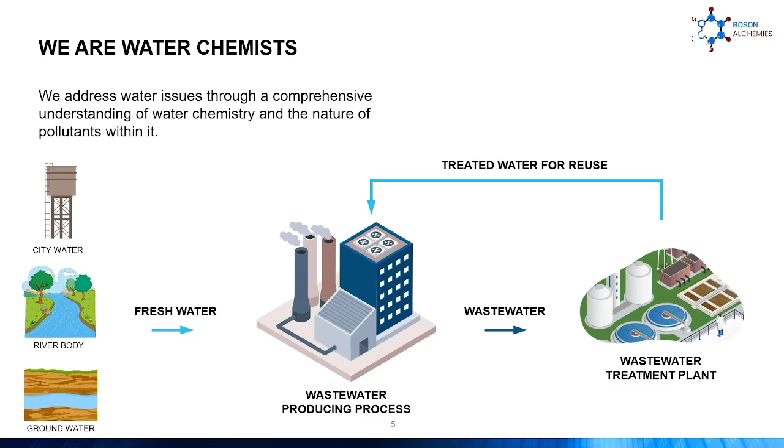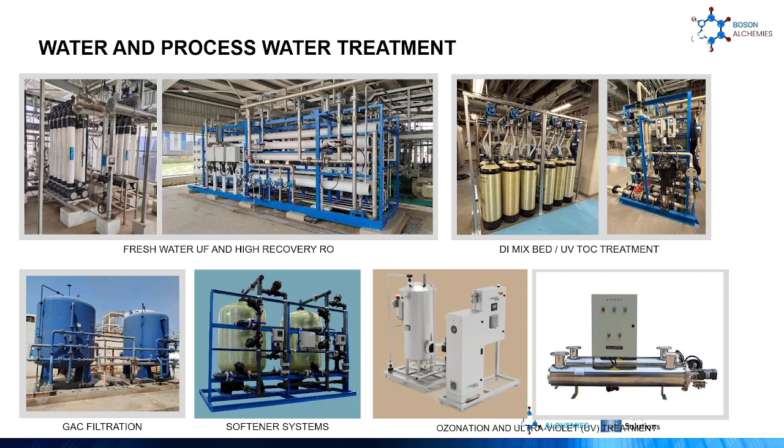Coming to fresh water, we do ultrafiltration, reverse osmosis, basic filtration to remove organics from well water, water softening, activated carbon filtration treatment, ozonation, ultraviolet treatment, and also DI water generation. We have different types of water treatment that we can deploy. That is something that we do in fresh water treatment.

When it comes to wastewater, we have developed technology using catalysts. These catalysts can remove and treat dioxin compounds, toxic compounds, and remove toxicity. We also can easily, effectively treat PFAS, and I'll repeat again, we treat PFAS. We destroy the PFAS compounds. We don't segregate or separate PFAS. The traditional technologies that are available can separate PFAS using either carbon or some kind of media. So the pollutant gets transformed from one stream to another. It does not disappear. It does not get destroyed.

There are membrane technologies and carbons that you can use to separate PFAS. But how do you treat it? We can actually oxidize PFAS compounds. So if you have the RO reject, which has all the PFAS compounds in it, we can treat the reject of RO to remove PFAS. We actually break open the carbon-fluorine bond. The C-F bond is the key bond where the PFAS compounds come from. So the perfluoroalkyl substances treatment is something that we can easily do using our oxidation process.

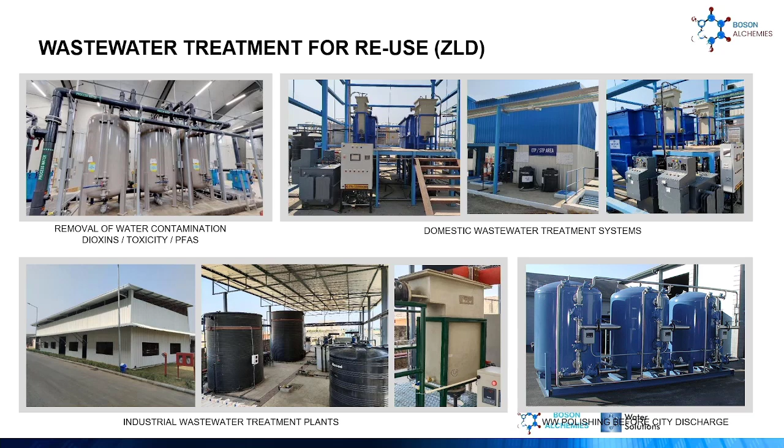We also do domestic water treatment. So if you are looking at treating sewage and bringing water back for reuse, we can do that. And of course, our strength is treating industrial wastewater, and we have done many installations across. We also do polishing. Sometimes people have compounds like residual phosphorus remaining in their wastewater before city discharge, or some toxic metals left over. We can treat that using a polishing unit with the same catalytic bed.

In terms of our strength, because we use a technology which does not need a lot of power or energy usage, with our process you can increase your profitability because you do not have the kind of OPEX that traditional systems have. We just have a pass-through bed that goes through the treatment in a simple vessel, and the catalysts take care of the pollutant. So in terms of our strengths, the amount of sludge and secondary waste that is generated in our technology is very less.

We can reuse more water with better quality. We can treat very challenging contaminants. Our plants are very simple to operate—it's just switch on, switch off. There is no adjustment of pH, you don't have to do MLSS calculation, there is no F/M ratio. There are no such complex things that are required. You don't have to check whether the bacteria is alive or dead, or whether the bacteria can handle this wastewater or not. Those challenges are not there with us.

And we need the lowest footprint. We do not need large aeration basins, large anoxic tanks, and a lot of storage. We don't need all that. We simply need a process tank with 3 minutes, 5 minutes, or 10 minutes of reaction time, and the water is treated.

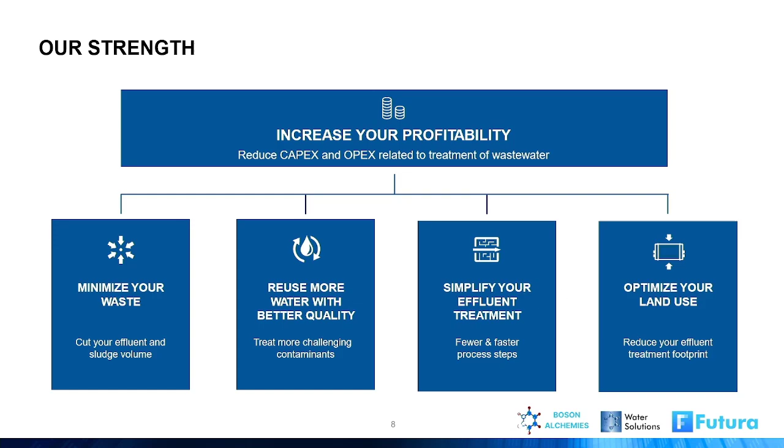Coming to, as I mentioned, we are basically chemistry driven. So looking at chemistries, we can treat aromatic compounds, ammonia, phenolic compounds and phenols, cresols, organics, phosphates, sulfates and nitrates, the inorganic salts. We can treat dioxin compounds, do hydrocarbon treatment - anything that is non-biodegradable we can easily treat.

It can be polymers, it can be colloidal silica. Many places you'll see that water has silica present in the form of bore water or groundwater. With that silica, if you have to treat the water, it's going to destroy the membrane, because silica is very abrasive for reverse osmosis or nanofiltration membranes. So you don't want silica to pass through those membranes. Treatment of silica is very important.

Similarly, if there is disinfection required, if you need PFAS compounds to be treated, if metals have to be removed, this is an area where we can actually help.

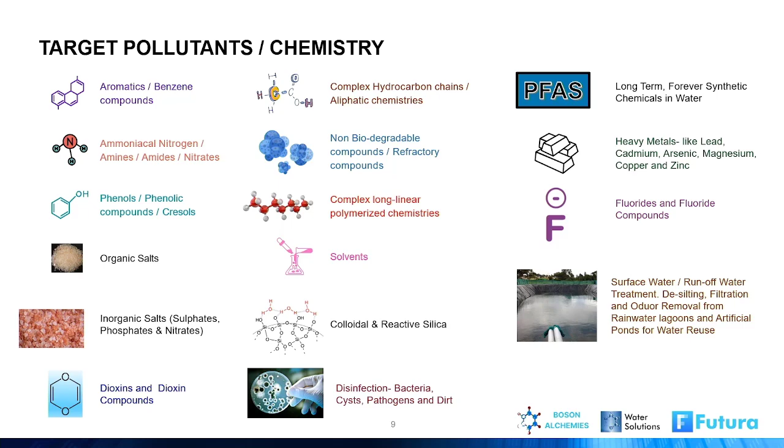Conventional versus us - our technology we call hydro-oxidation, as a process, as a brand name or whatever you call it. As compared to conventional processes where you have multiple steps - coagulation, flocculation, aeration, anoxic - different steps that the water goes through, whereas in hydro-oxidation, our process, we have one single step which has the combined effects of all these different steps and processes. So it is very simple.

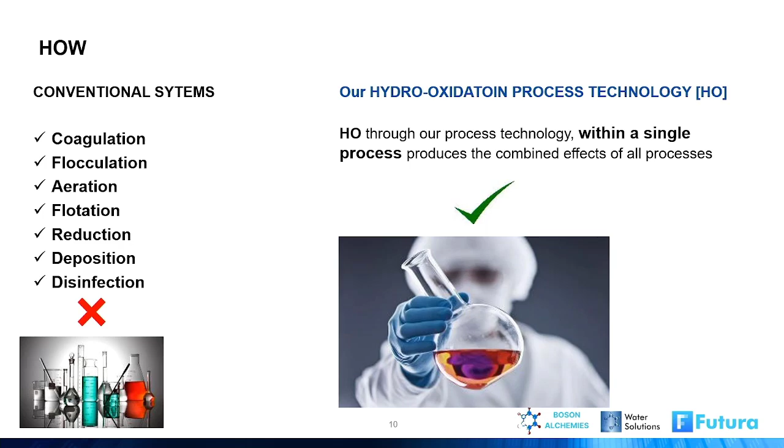It is more potent or more effective in terms of treating much more challenging compounds. So our brand name, or company tagline, we call it hydro-oxidation. It is nothing but a catalytic oxidation.

It's a known process. Instead of using powerful oxidants like hydrogen peroxide or using Fenton and all those processes, we have fused molecular oxygen in the catalyst. It replaces technology like Fenton. It helps you get rid of hydrogen peroxide, because we use catalyst to generate the same molecular oxygen to degrade organic compounds. So when the compounds are degraded, they get converted and destroyed into CO2, hydrogen, oxygen, nitrogen.

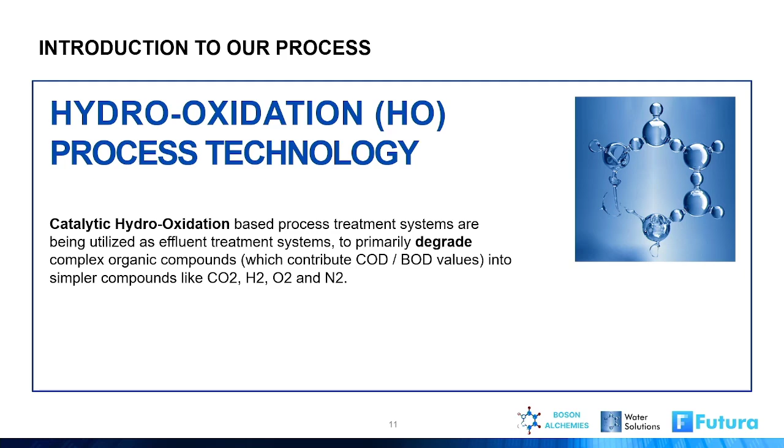It breaks that open into simpler molecules. So in terms of how it works, typically we have a catalytic bed, a catalytic reactor, where we have the catalysts in the reactor, and we can use a DC power source or we can use it without the DC power source, where the wastewater enters the catalytic reactor and generates OH radicals.

Those OH radicals are hydroxyls which degrade the compound. Once the water is treated, it goes downstream. There is separation of solids by use of filtration, and the water is put in a treated water tank. Further downstream, depending on the content of TDS, it can go to a reverse osmosis membrane, or it can go to an evaporator, or it can be used for discharge to city, or it can go for gardening, depending on the end use. So that's how the process works.

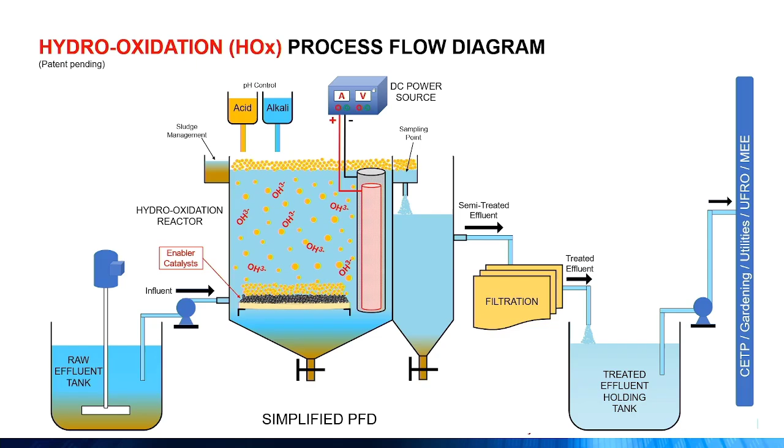These are just the steps, the same process that I just explained. These are steps in writing.

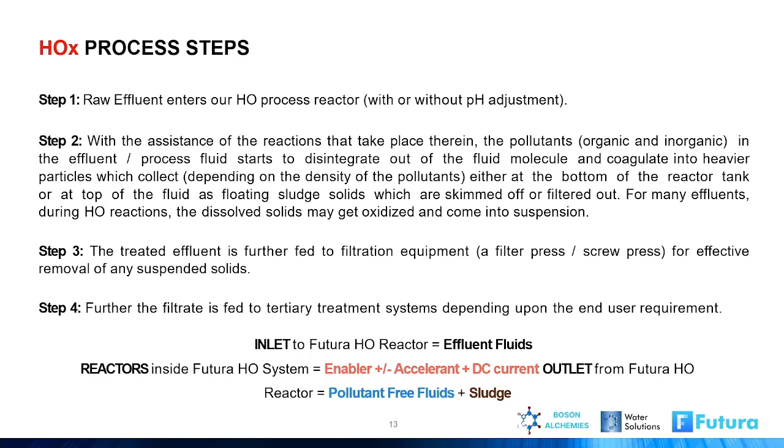So I would like to move forward with the basic - this is another offshoot of the same catalytic technology, the catalytic oxidation process that we developed. That particular process is indiscriminate, it works on all pollutants together.

It will work on COD degradation, it will work on ammonia, it will work on any organic that is there - it will degrade. If there is any phosphate salt, any calcium salts, any nitrate salt, it will start degrading everything. In the real scenario in the world, what happens is people have specific problems - like you want to only degrade COD, or you want to only take care of cyanide, or you want to take care of metal.

Then we developed certain subsets of catalysts which are only targeted for certain organics. So we developed this set of catalysts only for certain types of problems. The process is the same - it does oxidation on the surface of the catalyst. The only difference is these are formulated catalysts for different problem areas. For cyanide, there's a different catalyst. For organics, there's a different catalyst. For removal of sulfide, there's a different catalyst. For pesticide, it's a different set.

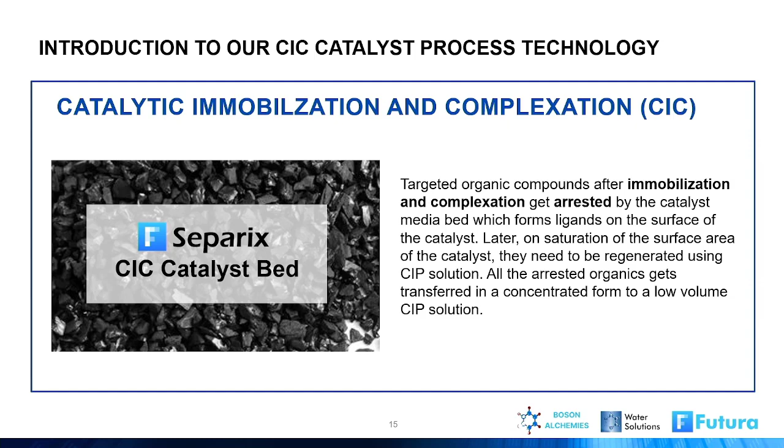So how it works - those who understand chemistry and physics will understand this well. It is a high surface area substrate on which we have doped the catalyst. When the water goes through the catalytic bed, it may have many pollutants like COD, BOD, color, turbidity, organics, nitrogenous compounds, metals. When it passes through, the targeted compounds get arrested by the catalyst, forming ligands on top of the surface of the catalyst. Only when the regenerant and the conjugate of the catalyst enters the catalytic bed are these arrested compounds released into the regenerant. This is how the technology works, and once the regenerant fluid is saturated with the compounds, it gets discarded.

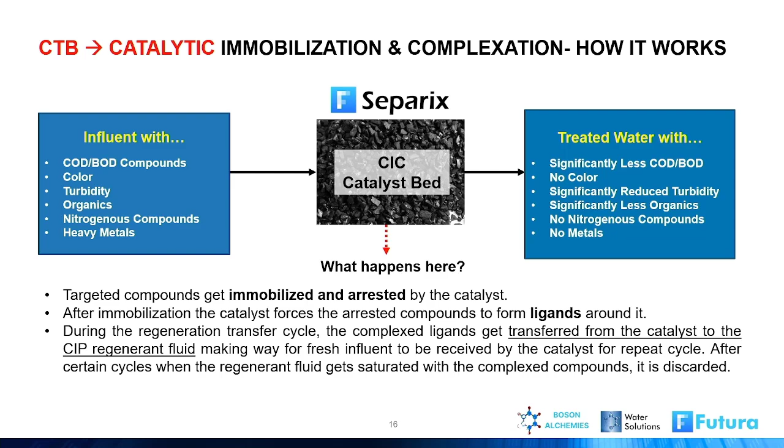So as I mentioned, the CIC catalytic bed treatment is designed for different formulations. It can be for any of these - phenols, hydrocarbons, dyes, metals, halogenated compounds, produced water, oil and water emulsions, removal of ammonia. There are a lot of different catalytic formulations that we have developed.

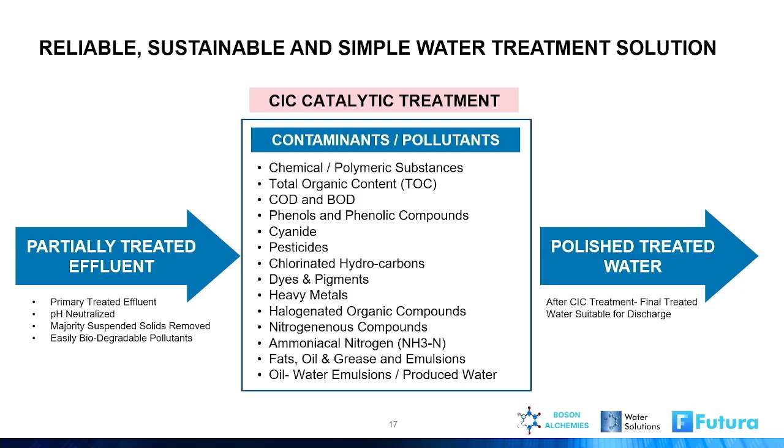In terms of operation, the CIC bed process is very simple. There is effluent feed, so there is a forward flow. There is a backwash in case there is any suspended solids in the water, and a backflush. The backwash basically releases any suspended solids that get captured and settled on the catalyst surface - we don't want the surface area to be blocked. During saturation, a regenerant fluid comes in, and this regeneration releases the captured compounds into the regenerant stream.

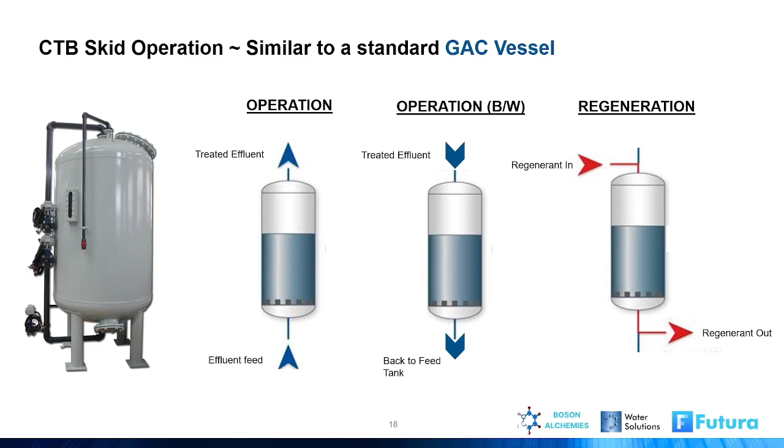We have our pilot setups on the catalyst treatment. We have pilots with 1000 liters per hour capacity, 200 liters per hour capacity. We also have the oxidation process treatment with 1000 liters per hour capacity pilots that we've developed.

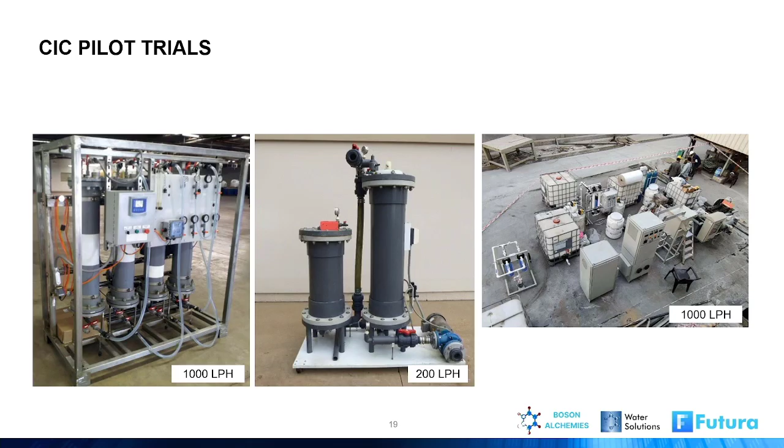In terms of advantages, as compared to conventional, our plants are ultra compact with less than 10% space required. We don't have any civil works. We don't use any bacteria, so there is no MLSS, no FM ratio, no biomass calculations - it is simple switch on, switch off. We don't need any skilled manpower to run the plant. All our plants are modular, so we don't have large civil infrastructure-based installations which cannot be moved. You can install our plants anywhere and shift them any number of times. Our plants are delivered in 10 weeks time - 10 to 12 weeks is what we need to supply the plant.

Everything is modular in our process. So in case you are looking for a certain capacity now, you install only that capacity now. When you want to expand, you add more modules. You don't have to install all the capex and opex for the future - you install as and when you need it.

Similarly, the sludge generation is much lesser - less than 70% sludge compared to conventional, because we don't add anything to our process. The water goes through the catalytic bed and comes out. We remove pollutants and don't add any food - there is no food to be given to bacteria or anything. So we are not adding any sludge in the system.

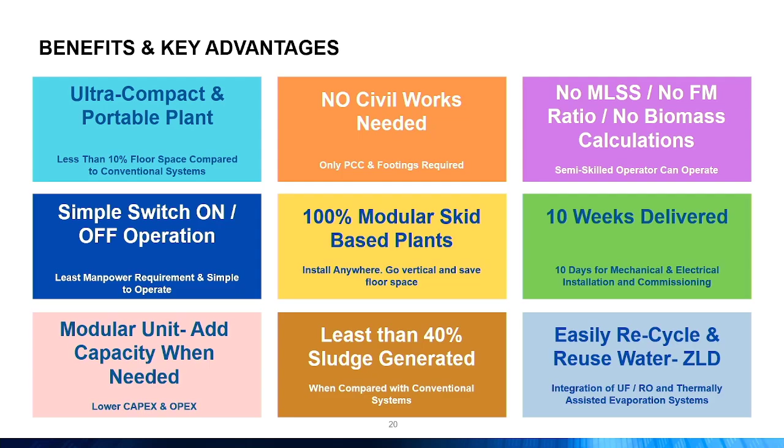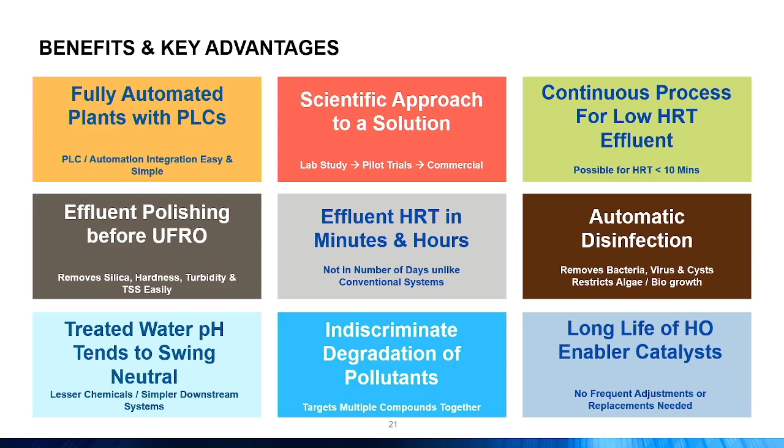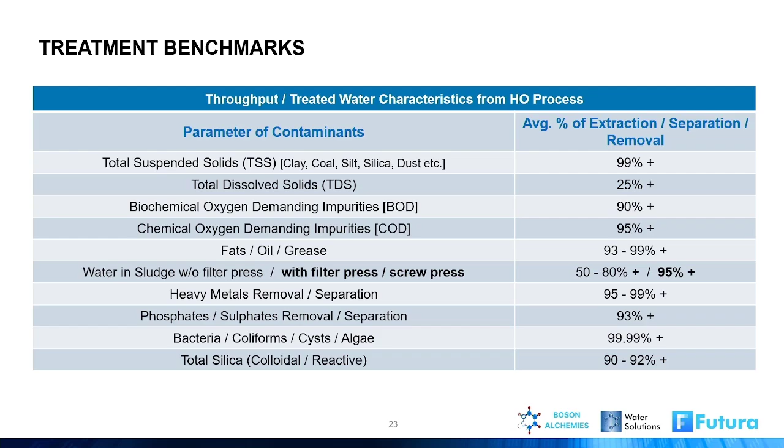We have treated many effluents. We have seen reductions in COD, reductions in BOD up to 95%. We can reduce silica, suspended solids. We can remove heavy metals. We have seen removal of phosphates and sulphates to an extent of 93%. So these are the efficiencies that we have achieved so far in our system.

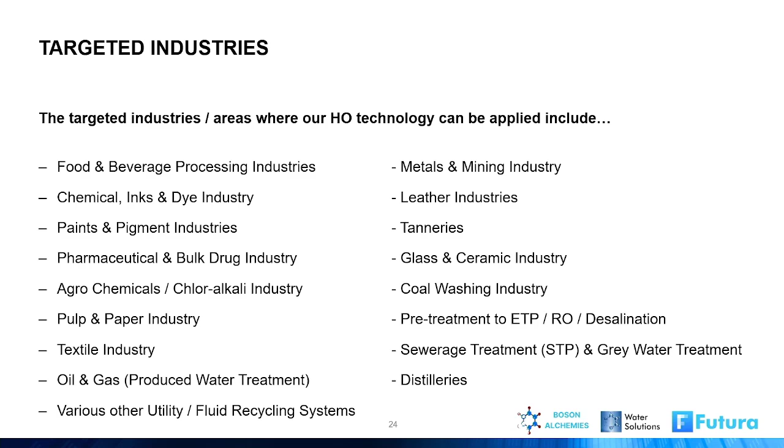In terms of industries, every industry that you know of, right from food and beverage, oil and gas, agrochemicals, chemical, pharma, textile, pulp, paper, paints. I mean, you name the industry, it's a target industry for what we do.

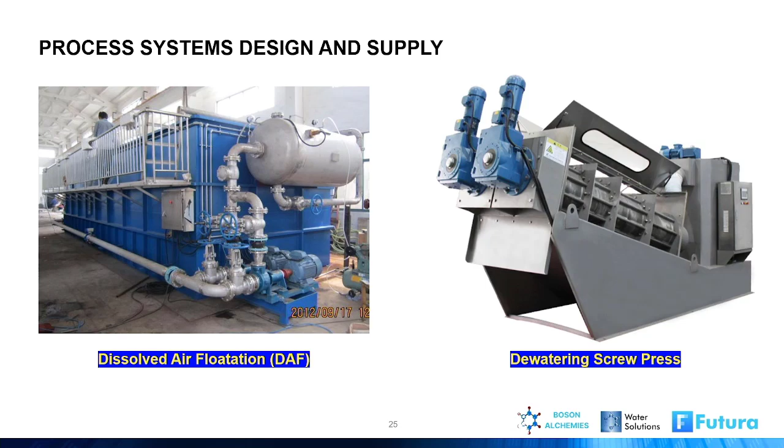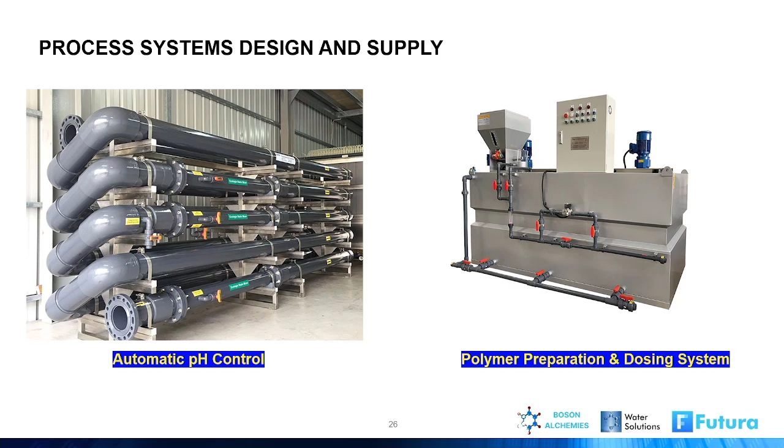When we supply the plants, we have our own process systems that we design and supply. So you can see we supply DAF. For filtration, we use equipment like DAF and screw press, which is a continuous process, because we need continuous process in our type of plants that we do. All pH control, preparation of poly and dosing of poly is all automatic. All the skids for CIP and treatment is all that we develop in our processes.

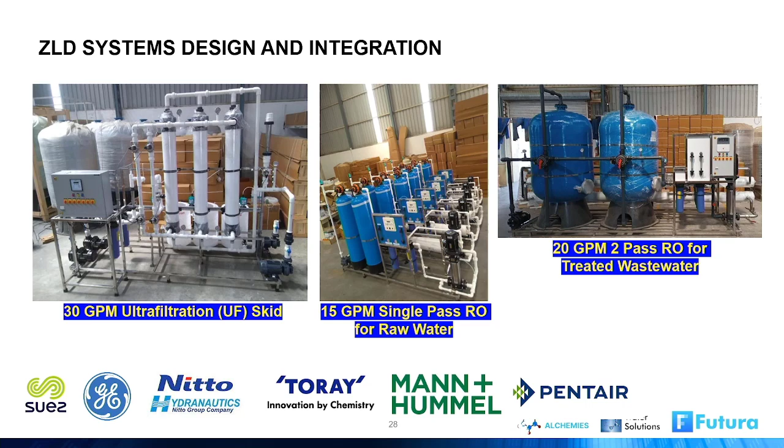Ultrafiltration. So downstream, when you are looking at reduction of TDS and suspended solids, we design ultrafiltration, reverse osmosis plants for downstream. We work with all the reputed manufacturers like Suez, which was earlier GE, Hydranautics, Toray, Mann and Hummel, Pentair, DuPont, LG, these kind of manufacturers.

We also have the capability of designing ZLD systems. So these are using MEE and MVRE systems. So when you're looking at evaporation of concentrated salts, that's where these things come in picture.

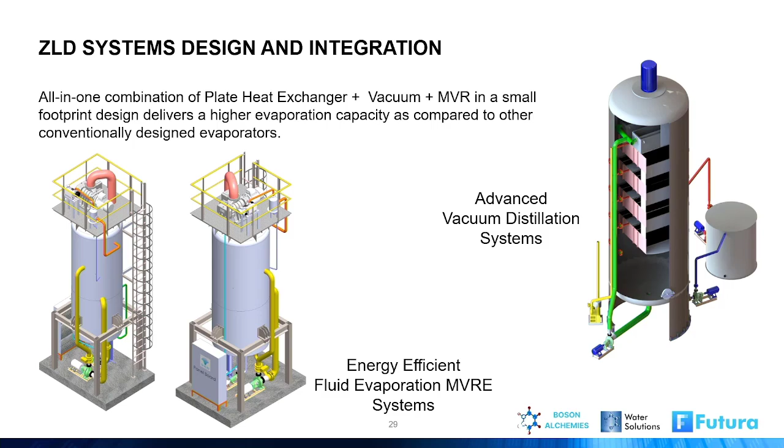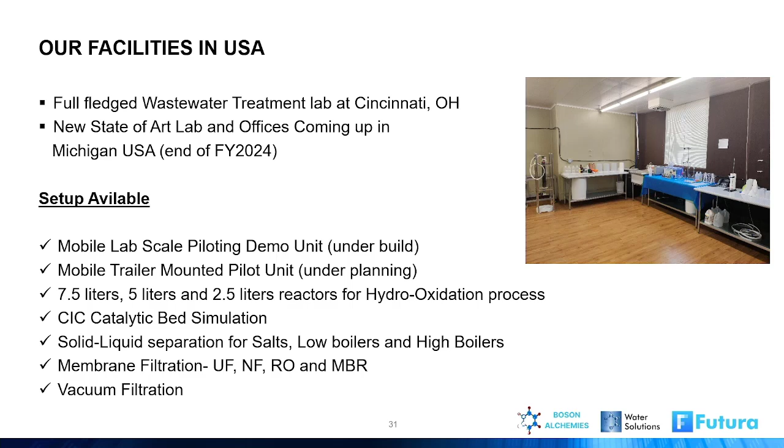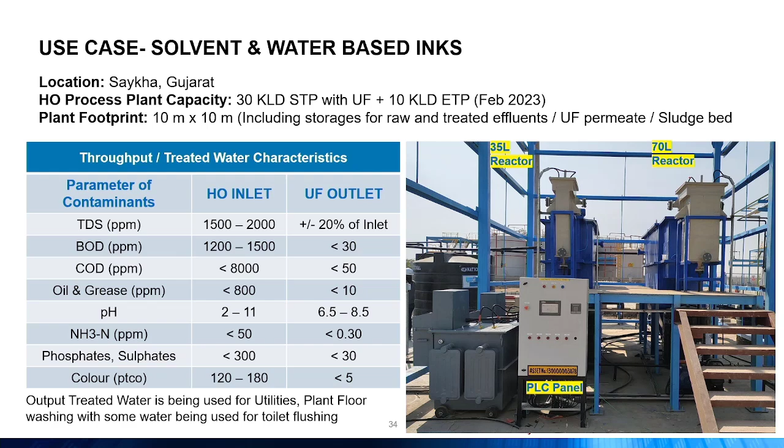Some cases, here are some installations that we have done. So this is one of the installations for an ink manufacturer. This is a Japanese company which makes solvent and water-based inks. So we set up a plant for them. This is 40,000 liters of treatment that we do every day.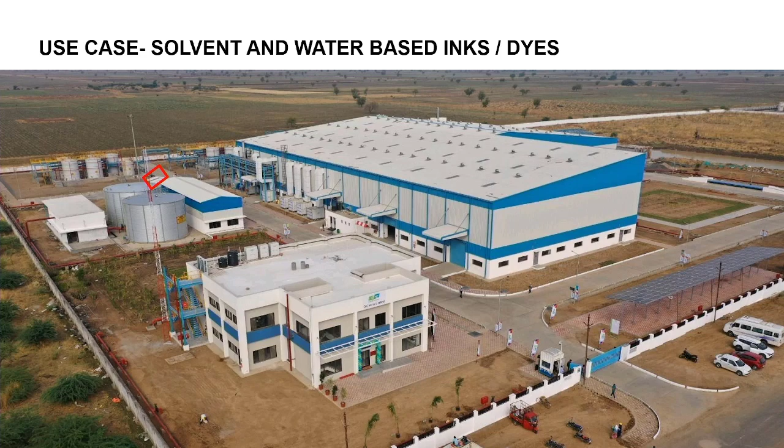So this is the facility. You see that little red block that you see, that is the plant. There's a whole facility that we have set up, but the effluent treatment plant is a very small, minuscule part of it. So this is what it looks like before construction of the shed. So the shed has now been installed, so it is an operational plant. We operate and maintain also this facility for the client.

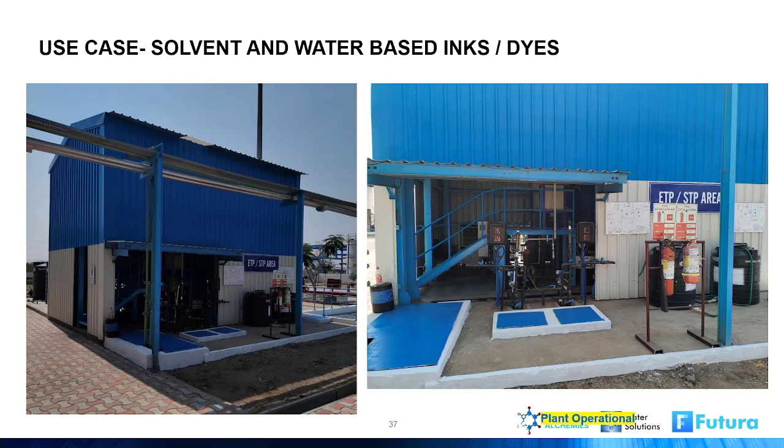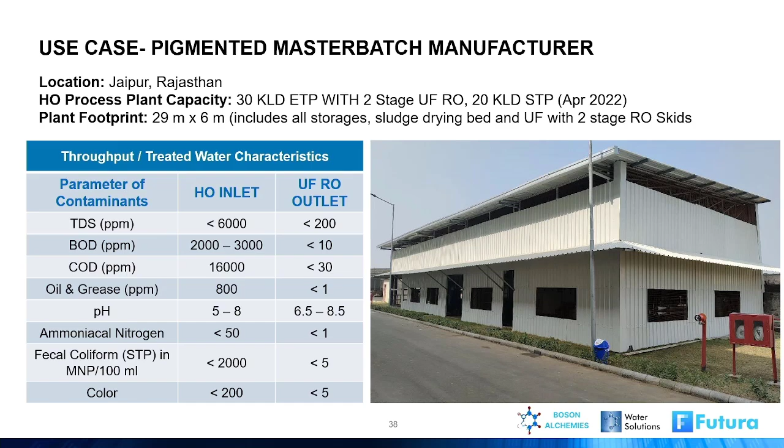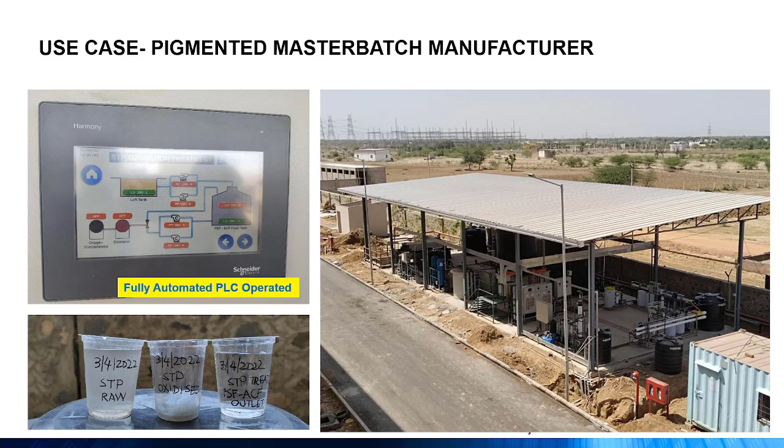It's a completely PLC operated plant. This is when it was in construction. The picture that you see on the screen is when it was under construction. So this is how the inside facility looks like. We are using all surface tanks. It's very nicely, very well maintained facility as a wastewater plant.

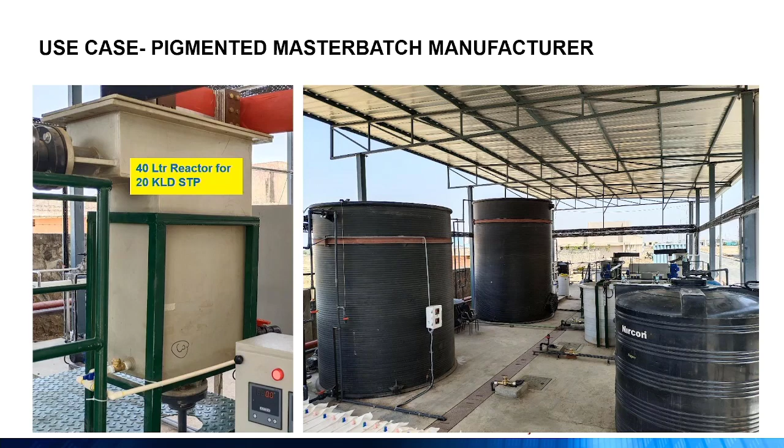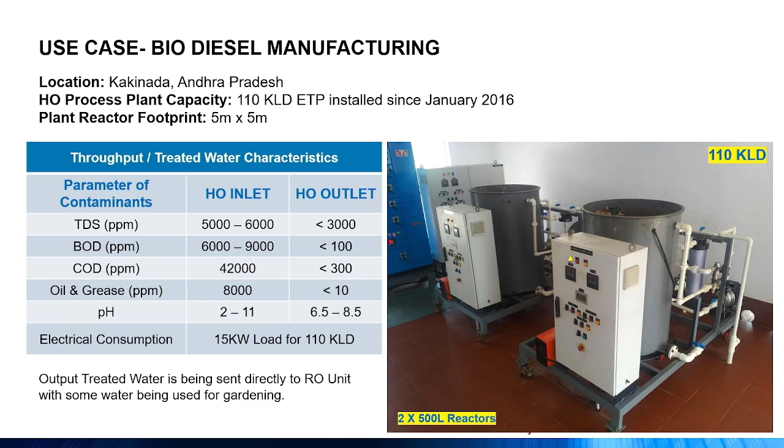So that is the beauty of the residence time that we need. We need very less time to treat water. That's why we don't need a lot of space. This is a vertical installation we did for a pharma company.

They make sodium valproate salts through a distillation process, and after distillation there are traces of the product in the wastewater. So we are removing and extracting the product, bringing the COD from 350,000 as feed down to less than 1500 through product extraction. We are also recovering the product and giving it back to the client for reuse in the process.

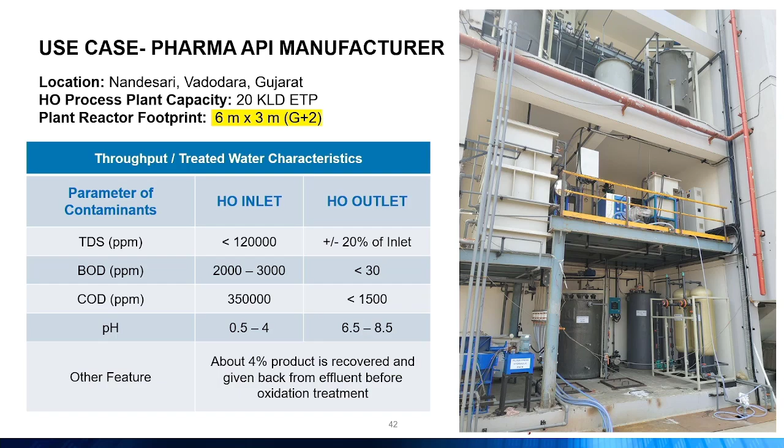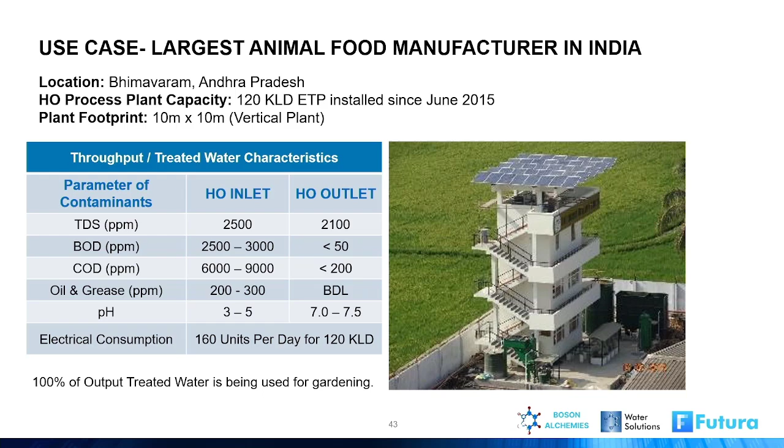There are installations we have done for animal food. This is a plant in southern India, in Andhra, for animal food. Then we have installations in crop manufacturing for sulfur chemistry, where we have done treatment plants.

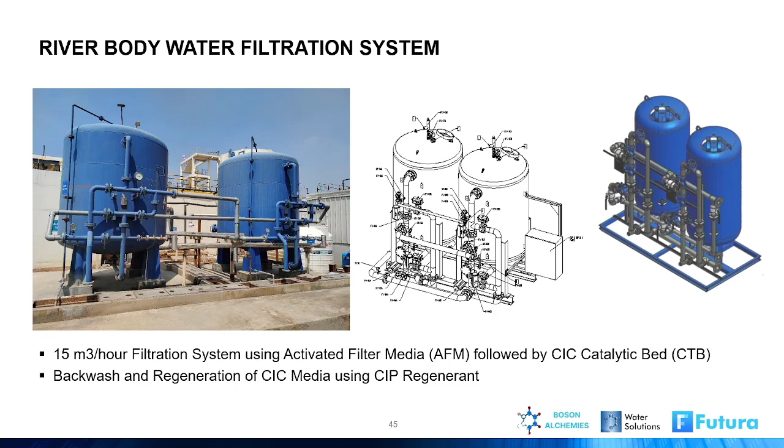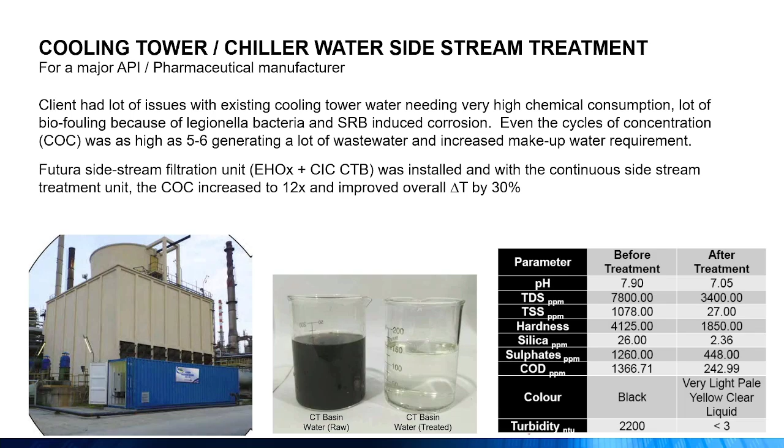We have done cooling tower treatment. You can see the pictures on screen, the basin water of the cooling tower with SRB bacteria — there's Legionella and sulfate reducing bacteria. The moment you have SRB, the water turns black. We treated that water, and you can see the parameters: high COD and high hardness, which we reduce in our process. The delta T of heat transfer is impaired drastically because of these bacteria, but we can treat such chemistries very easily.

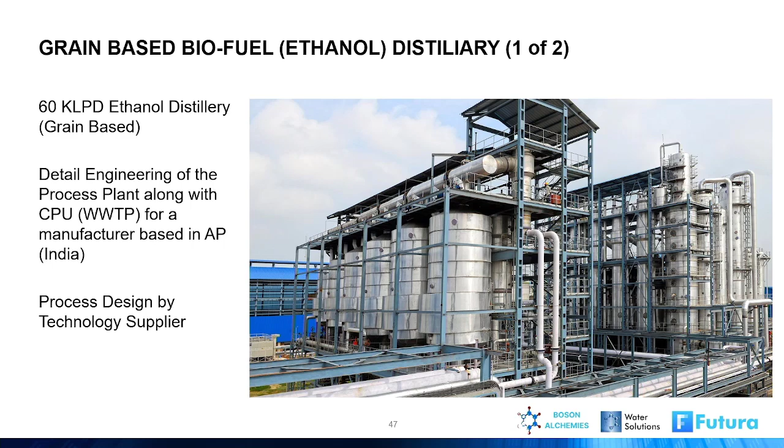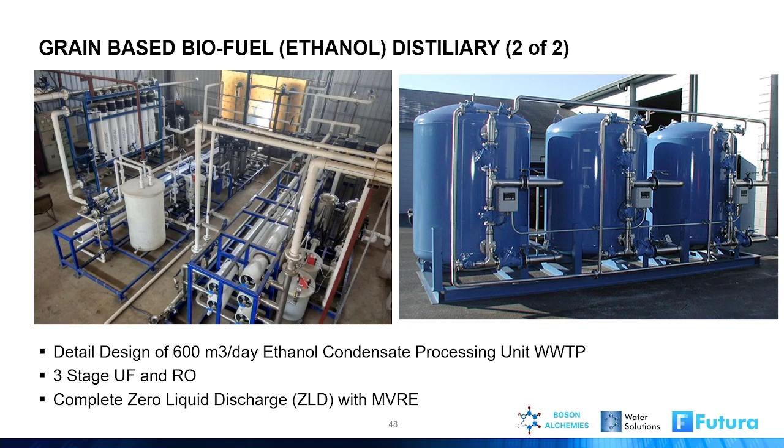We have done treatment of ethanol plants. This is a grain-based distillery where they typically use a CPU to treat ethanol wastewater because it has acidic effluent with presence of organics and very low pH. Normally they'd want to treat it using a CPU with aeration and anoxic tanks, needing a lot of infrastructure and space. With our process, we just need a CIC bed followed by UFRO and we can recycle the entire set of water — that's all we need, no large civil tanks required.

These are some cases where we did trials for customers. This is an esterification effluent that we did for a customer, and this is the result we achieved.

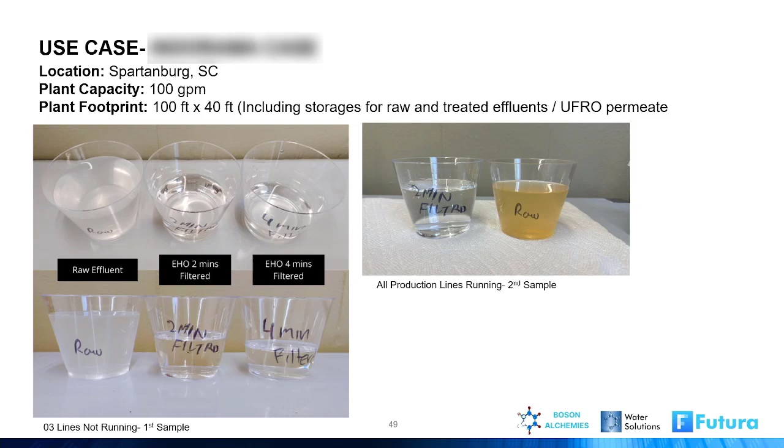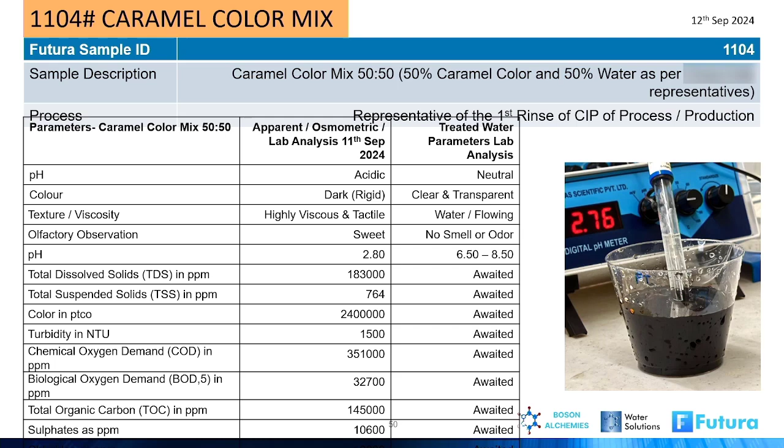We've also done effluents in food and beverage. This is a caramel color used in the beverage industry, and we treated this wastewater. This is how the treated wastewater looks for the client. This is a similar wastewater we treated for another food and beverage company effluent.

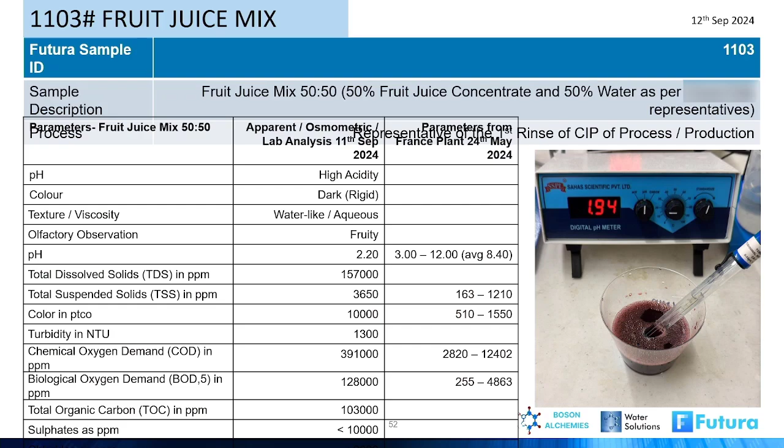I think that pretty much covers what we do. I hope this presentation was informative enough. In the limited time I had, I tried to present what we do and what technologies we use. I hope this was informative. I would be very happy to take any questions and follow-ups you may have. Thank you so much, my name is Amrish Mehta, signing off.